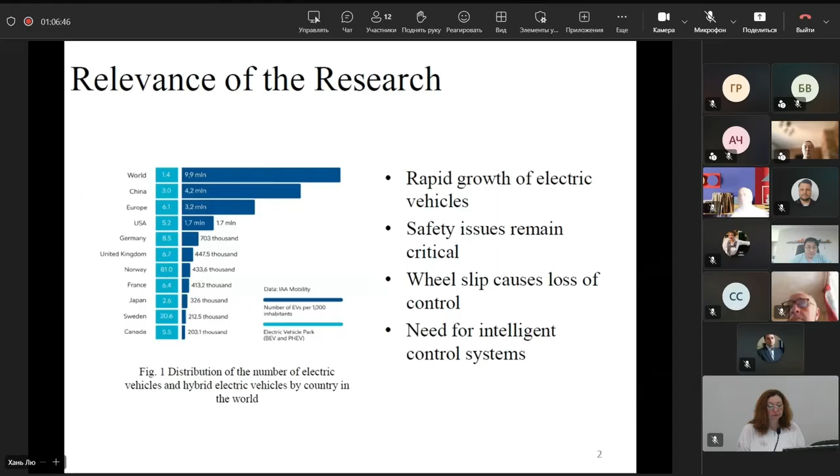Wheel slip occurs when the tractive force exceeds the available wheel-road adhesion. It is especially dangerous during acceleration on wet, icy, or loose surfaces. Existing ABS and ASR systems improve safety, but generally use fixed thresholds and respond only after slip begins.

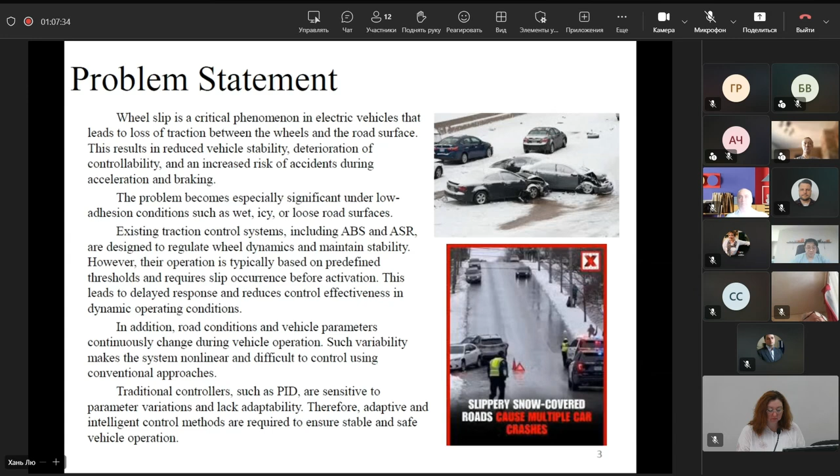Changing load and vehicle parameters therefore require more adaptive control methods. The aim of the dissertation is to improve electric vehicle operational safety by developing and studying a traction electric drive control system for detecting and preventing wheel slip, taking into account static and dynamic characteristics of the induction electric drive and the specific features of wheel-road interaction.

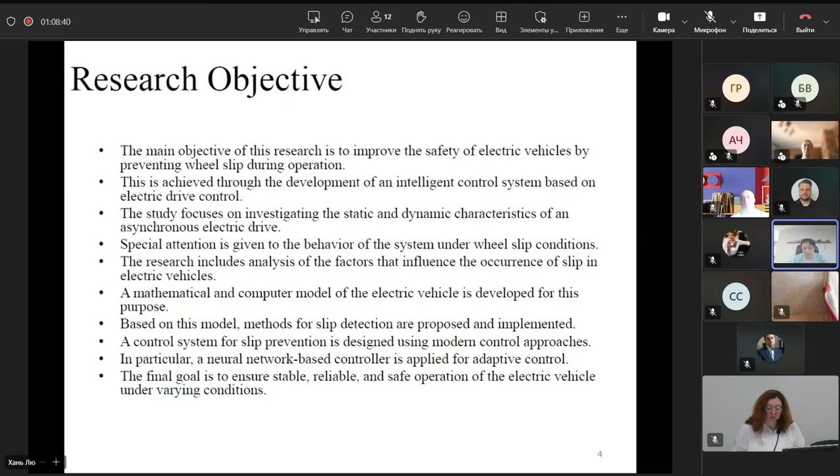The research tasks covered four main stages: analysis of electric transport and existing anti-slip systems; selection of transmission, motor, and onboard energy source; development and simulation of the induction drive and vehicle model in normal and slip modes; and synthesis and computer verification of the neural network-based slip prevention system.

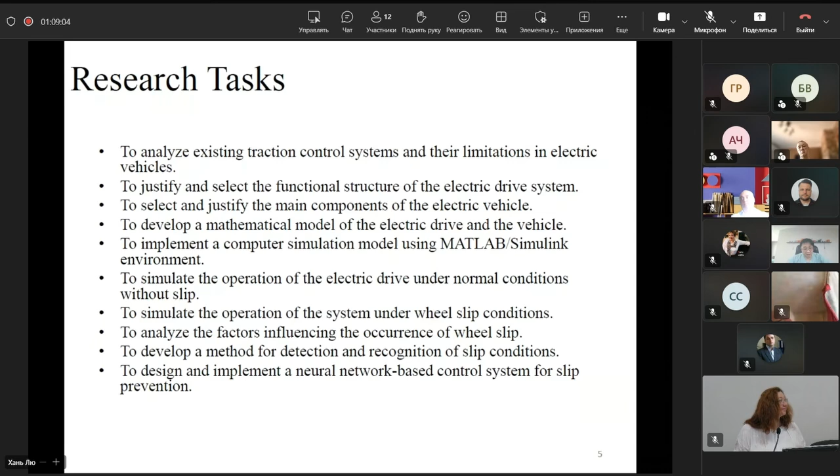The object of research is the process of improving electric vehicle operational safety by means of traction electric drive control. The subject is the transient electromechanical process in an induction drive with a wheel-slip detection and prevention system based on a neural network controller.

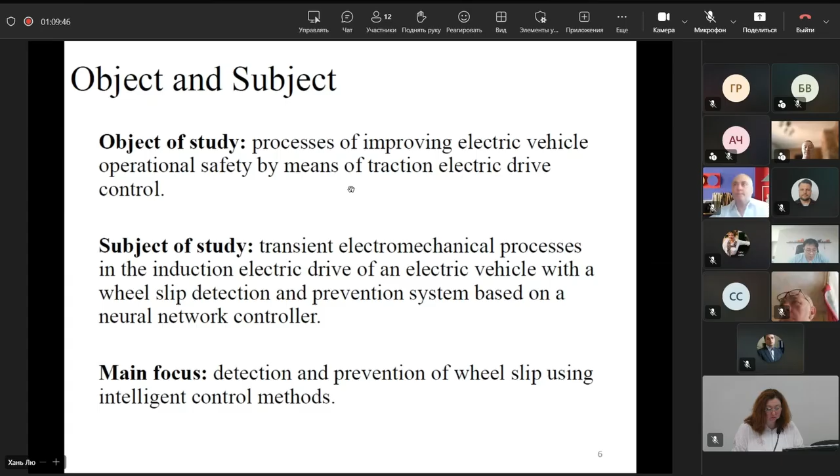The global expansion of electric vehicles is supported by environmental requirements, charging infrastructure, and advances in battery power electronics. This growth increases the importance of improving active safety systems, specifically for electric traction drives.

Modern vehicles use ABS to prevent wheel locking during braking, and ASR to limit excessive wheel slip during acceleration. Both systems use wheel speed information and influence braking force or drive torque to maintain adhesion and stability.

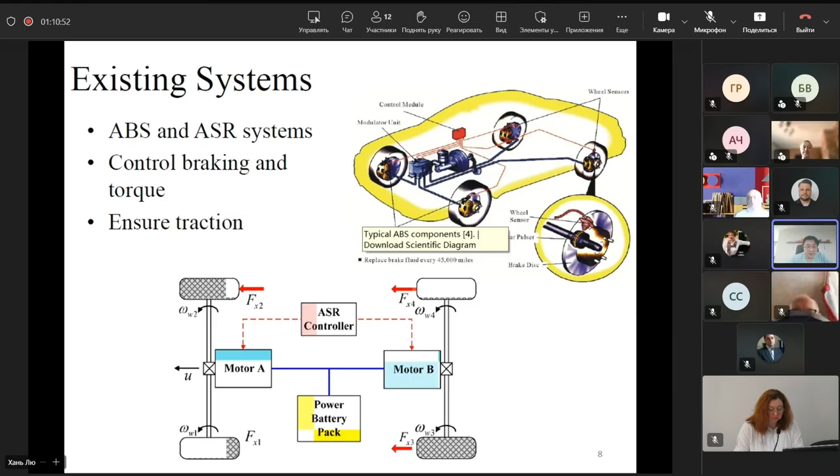Their limitations include activation after slip begins, dependence on predefined thresholds, and sensitivity to changing load conditions and vehicle parameters. These factors can delay or reduce the quality of control in non-linear and time-varying operating modes.

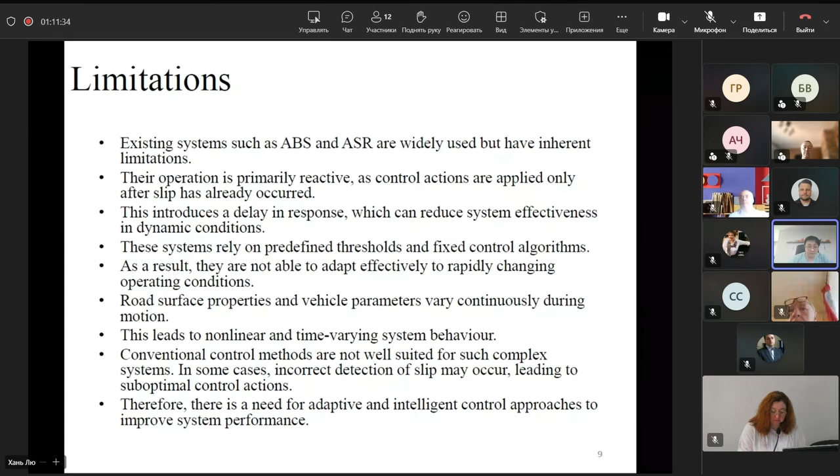The research gap is therefore the need for an adaptive system that can detect wheel speed mismatch and form an appropriate torque correction for changing adhesion conditions. This task motivated the use of intelligent control methods.

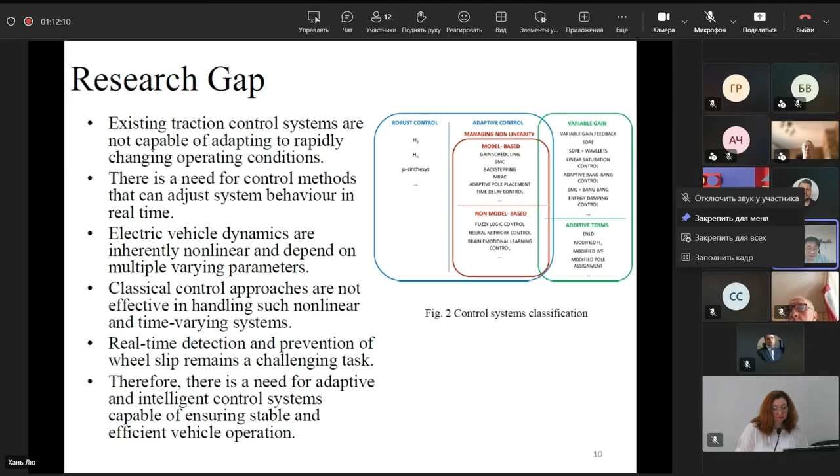The scientific results include a substantiated methodological approach to studying the traction drive as part of a complete vehicle powertrain; a mathematical and computer model of an electric vehicle with an induction traction drive; a method for detecting wheel slip by comparing vehicle linear speed with driving wheel angular speed; and an intelligent slip prevention system using a NARMA-L2 neural network controller.

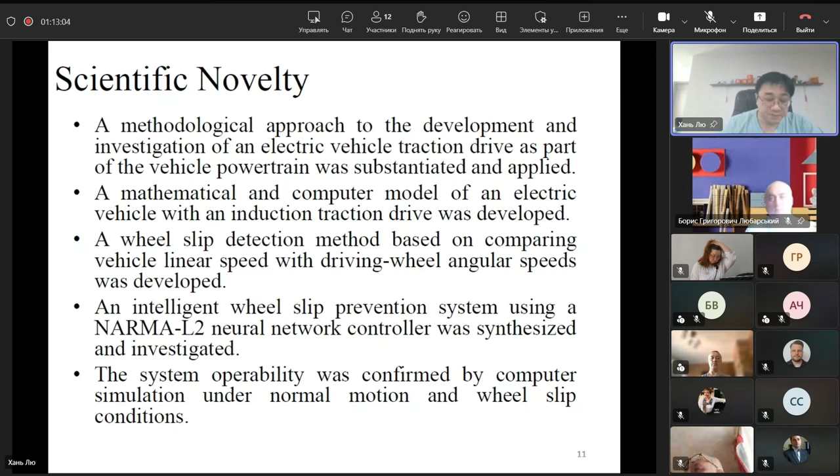The main contribution is an integrated study of power supply, converter, induction motor, control system, transmission, differential, vehicle motion, and external loads. The model supports both normal and wheel-slip modes, while the control forms its action from speed mismatch and reduces the uncontrolled spin of the slipping wheel.

The selected full electric vehicle structure includes a charger, lithium-ion battery, power converter, induction traction motor, mechanical transmission, and differential. This configuration was used as the basis for the mathematical and computer models.

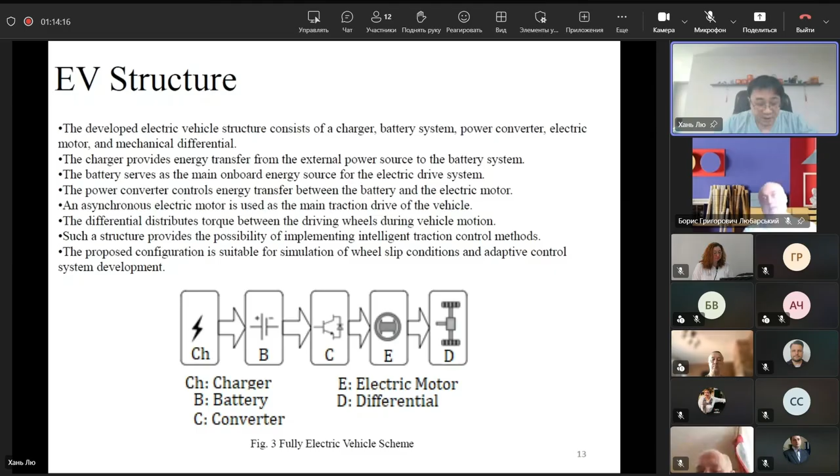Transmission ratio and torque characteristics were calculated to provide the required traction during acceleration and low-speed operation. The analysis confirmed the feasibility of using a gearbox in the investigated induction electric drive.

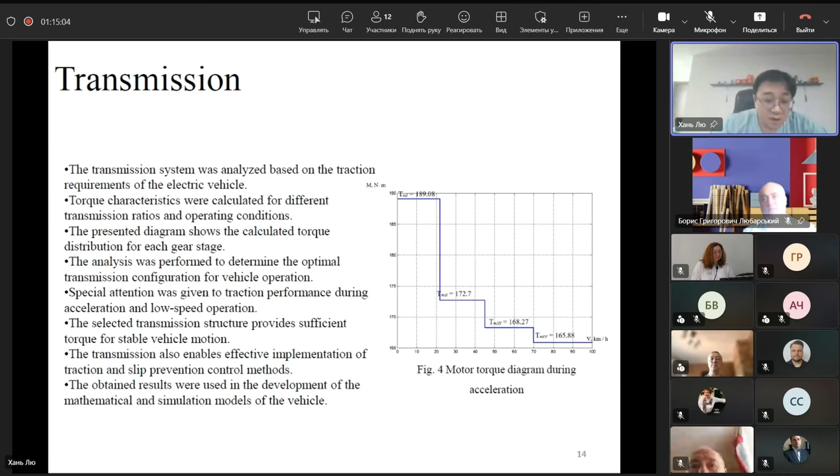A squirrel cage induction motor, AIR180M2, was selected after comparing alternative motor types. Its rated power is 30 kilowatts, rated speed is 2,935 revolutions per minute, rated torque is 95 Newton meters, and overload capacity is 2.2 per unit. The motor was also checked for power, overload capability, and overheating.

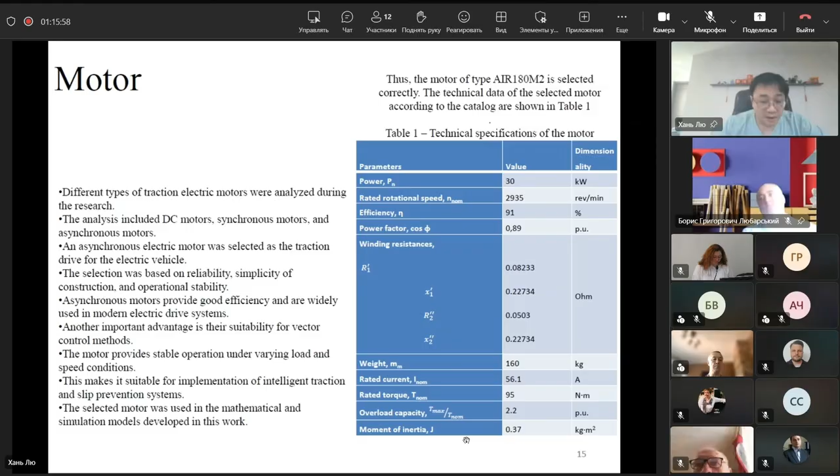The electric vehicle model was developed in MATLAB Simulink. It combines the battery, power converter, induction motor and its control system, mechanical transmission, differential, vehicle motion, and external load components. It supports simulation of both normal motion and wheel slip.

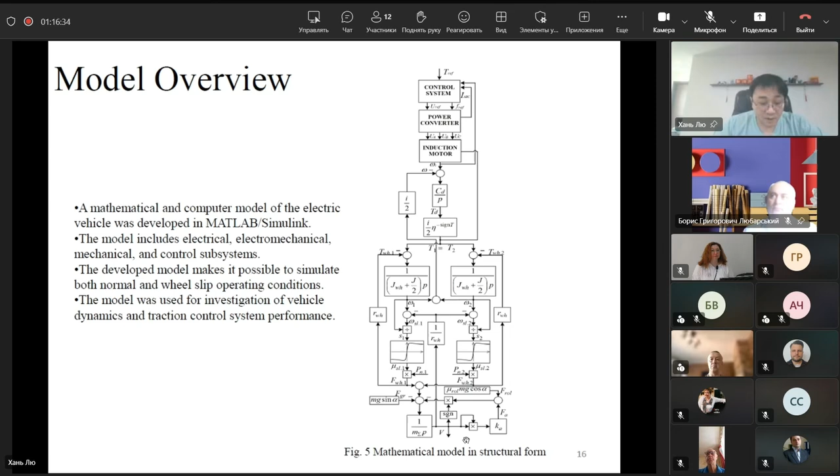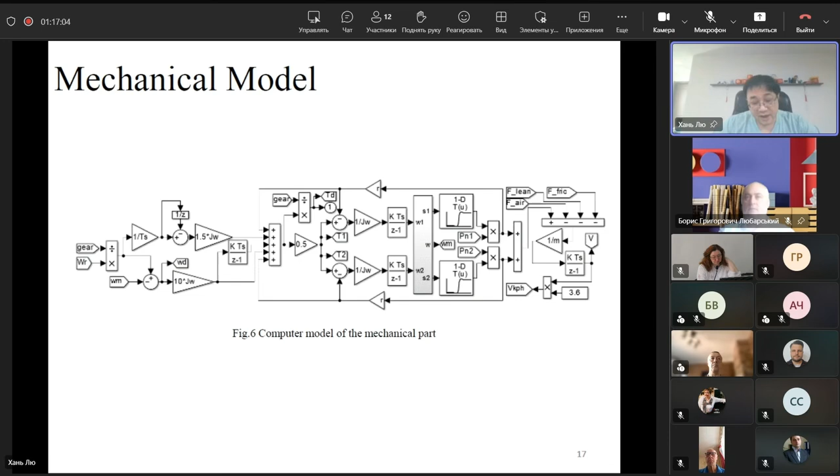The mechanical model describes the vehicle motion and wheel dynamics. It considers tractive effort, rolling resistance, aerodynamic drag,

gravitational force, the mechanical differential, and the relationship between driving wheel angular speed and vehicle linear speed. The load model calculation includes resistance force, normal reaction at the wheel, and the transmission ratio for the selected gear. This provides the mechanical load required to investigate normal traction and reduced adhesion conditions.

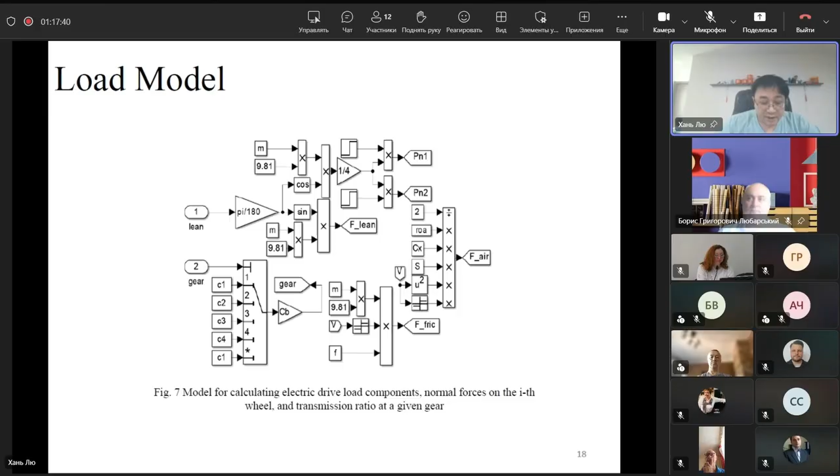The complete computer model integrates the electrical, mechanical, and control subsystems. It was used to analyze transient processes and to test the proposed slip detection and prevention approach under repeatable simulation conditions.

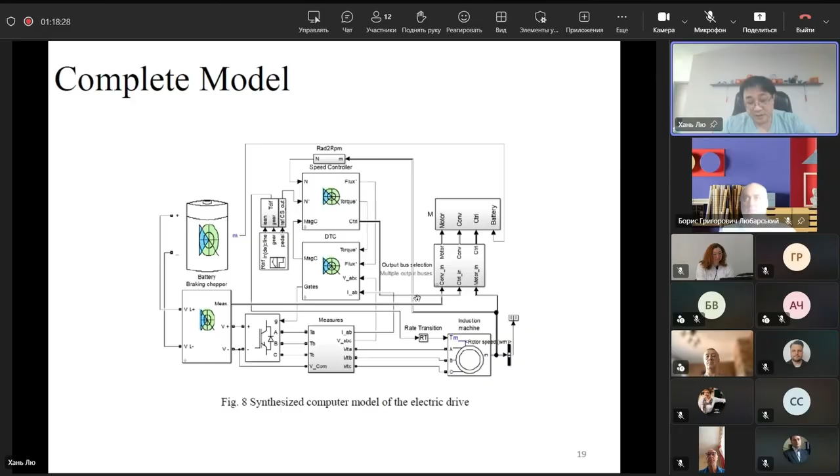Classical controllers, particularly PID controllers, are simple and effective under stable conditions. However, wheel-road interaction is non-linear and changes with adhesion, load, and speed. These limits on fixed-parameter controllers motivate the investigation of an adaptive neural network approach.

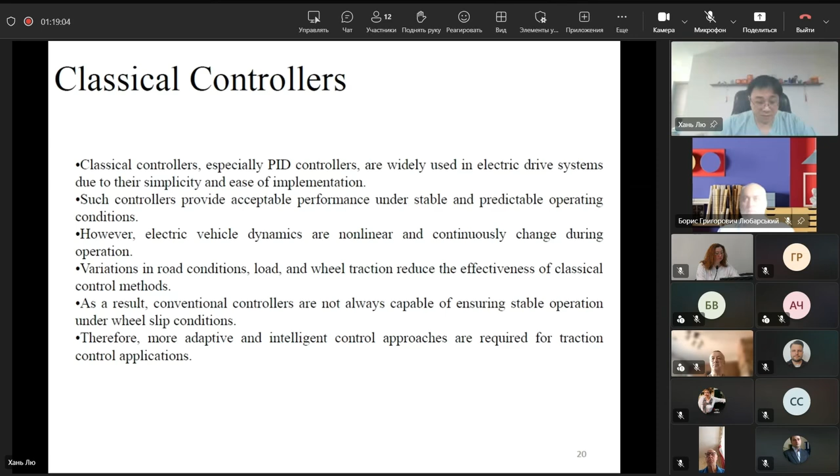Neural networks can approximate non-linear dynamic relationships from training data. In this work, they are used to identify the control plant and support torque correction according to wheel speed mismatch. The purpose is to reduce the uncontrolled acceleration of a slipping wheel as operating conditions change.

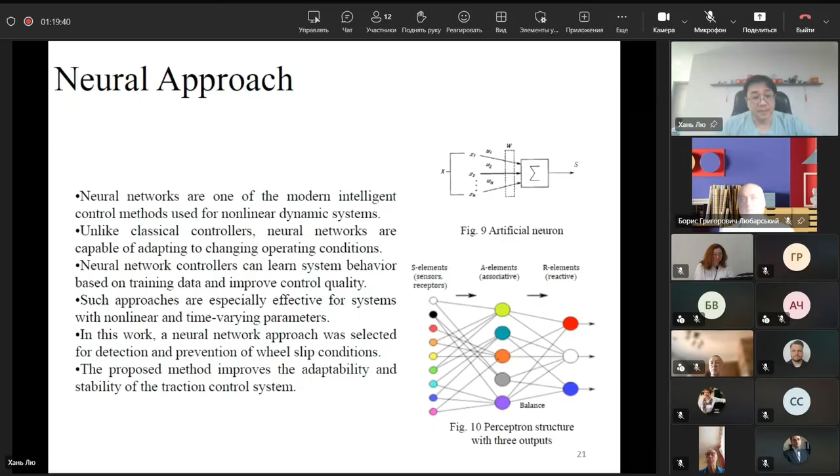The selected NARMA-L2 structure presents the non-linear plant in a form that allows the control input to be calculated from previous inputs and outputs and the desired response. The controller used the previously identified plant model and was implemented with the NARMA-L2 block from the MATLAB Neural Network Toolbox.

In the generalized control structure, the plant model operates on the error and minimizes the speed mismatch. The neural controller processes the reference and feedback signal and changes the torque driver command. In this way, excessive acceleration of the wheel on a low-adhesion surface is limited.

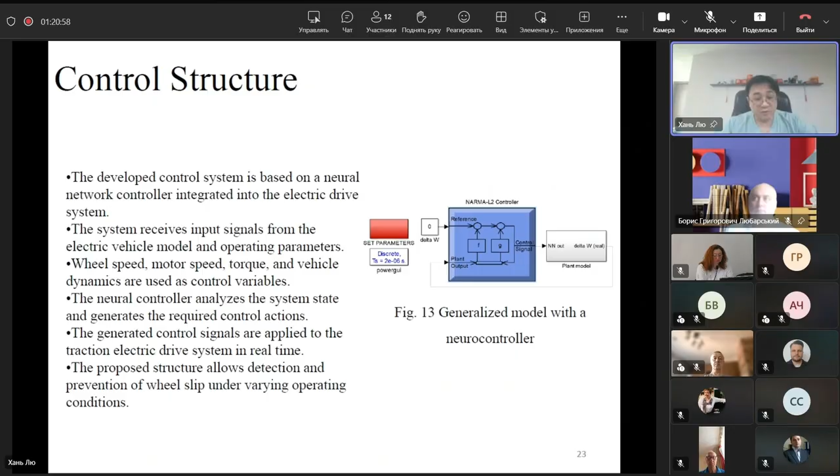The plant identification network was trained for 27 epochs. The training process determined the main control parameters for a linearized reference model. The identification result shows that the network reproduced the model response with a small error.

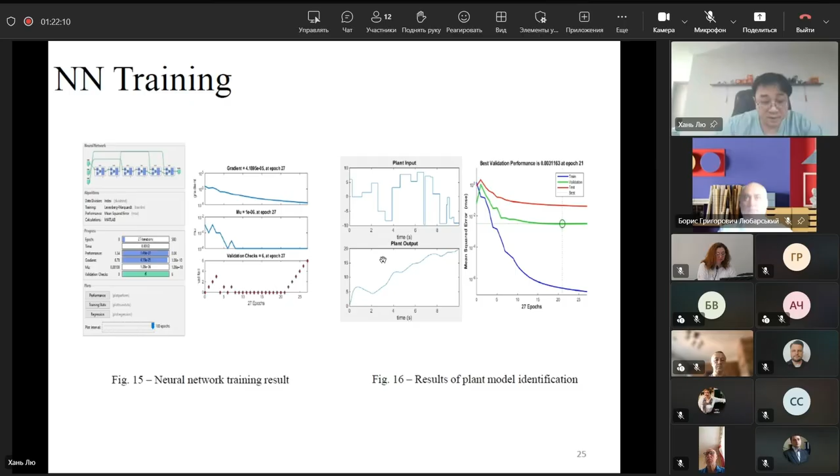The best validation performance was achieved at epoch 21. The regression coefficient was R equal to 0.98939, corresponding to approximately 1% signal error for the identified plant model.

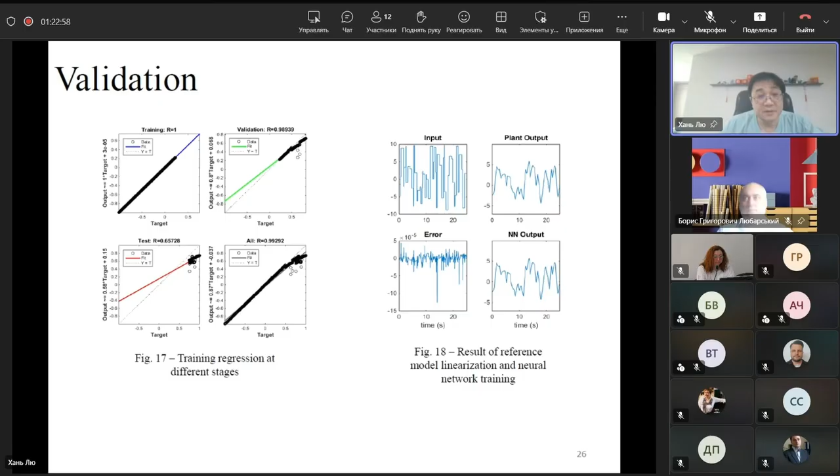Despite the linearization, the NN output followed the plant output very closely. The simulation sequence includes startup without slip, startup with one wheel on a reduced adhesion surface, and operation of the

neural controller, including operation when adhesion changes during acceleration. The road slope was zero, and the results show motor torque, wheel speed, vehicle speed, and their mismatch.

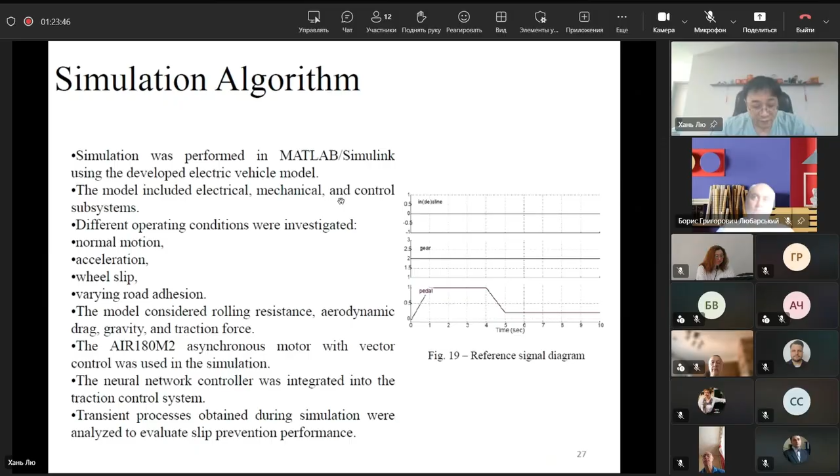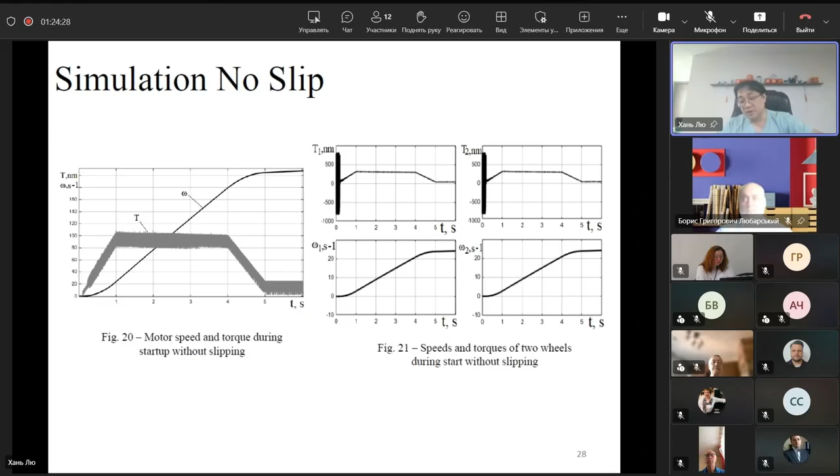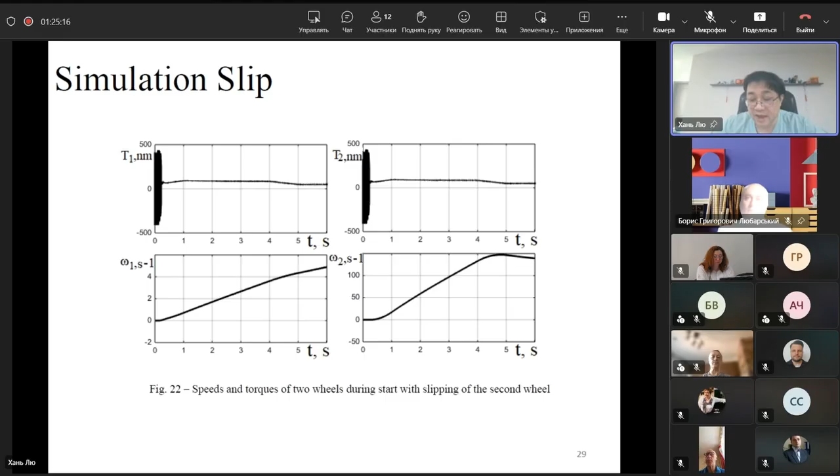The model considers longitudinal motion and does not include lateral skid.

The neural network control test began in second gear with the adhesion coefficient of 0.95 at 2 seconds. One wheel contacted a surface with a coefficient of 0.1. The controller reduced the torque in response to speed error and prevented uncontrolled wheel acceleration.

On the non-linear model, the remaining speed mismatch was 0.07 inverse seconds, or about 1%.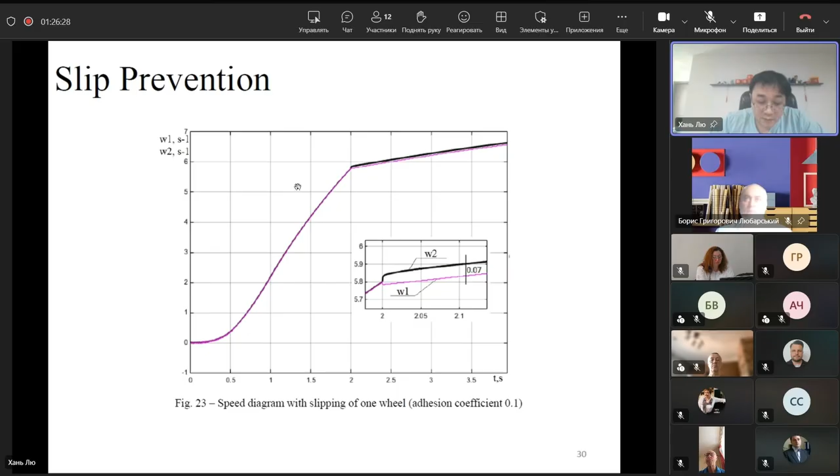Result analysis: the simulation confirmed the operability of the proposed system. A functional traction control scheme based on a NARMA-L2 computer model was developed.

The plant model and the controller were trained, and acceleration with subsequent one-wheel slip was simulated. The controller reduced the wheel speed mismatch and prevented excessive acceleration under the investigated conditions.

The developed model and simulation procedure can be used to study, design, and improve electric vehicle traction drives with slip prevention function. The NARMA-L2 system can serve as a basis for further control algorithm development.

The results have also been implemented in the education process at NTU Kharkiv Polytechnic Institute.

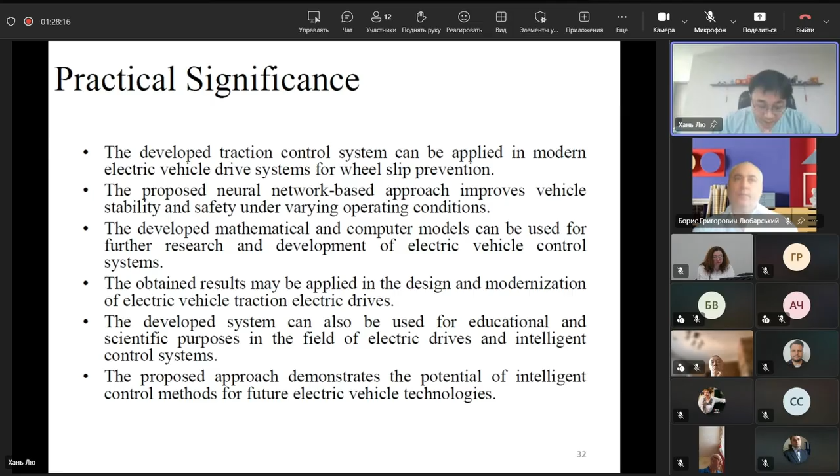In conclusion, the dissertation developed an integrated mathematical and computer model of an electric vehicle with induction traction drive, a wheel slip detection method based on speed comparison, and an intelligent NARMA-L2 control system. Computer simulation of normal motion and reduced traction modes showed that the controller limits uncontrolled acceleration of the slipping wheel. These results support further development of intelligent safety functions for electric drives.

Thank you for your attention. I'm ready to answer your questions.